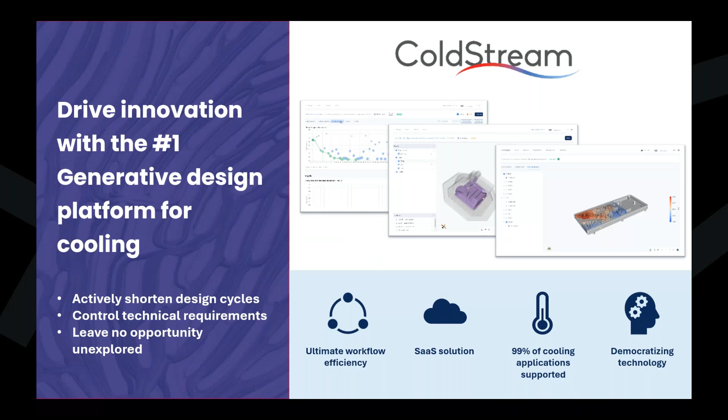Whether you have liquid cooling, air cooling, forced convection, natural convection, fans, pumps in your system, and so on, ColdStream supports the full system and can help you every step along the way to find the best possible cooling solution that fits your needs.

The reason why we can do that, or have that flexibility in physics and design processes, is by the way we constructed the platform in the backend. If you look at ColdStream from a high level, it's constructed as a combination of 5 different dimensions, 5 different building blocks.

I can imagine many of you are probably familiar with this simulation engine. In layman's terms, you give it a geometry, a product you have been working on, whether or not it already contains a heatsink, it doesn't really matter that much, but it can predict the resulting temperatures of your heat sources, your electronics, and so on, given certain environmental conditions.

It's basically a full three-dimensional CFD engine that can be used at high resolution, low resolution, and so on, and it predicts the performance of your product. Most of you probably use this on a daily basis to evaluate designs that you manually iterate over together with colleagues to see how to further improve it.

Now, what ColdStream actually enables is to couple the simulation engine with a shape generator. The shape generator can create, basically can modify your geometry, can control your geometry, and can create anything from pins and fin structures all the way to three-dimensional gyroids that are suitable for 3D printing, or complete freeform shapes. I will show you a few examples of that later on in this talk.

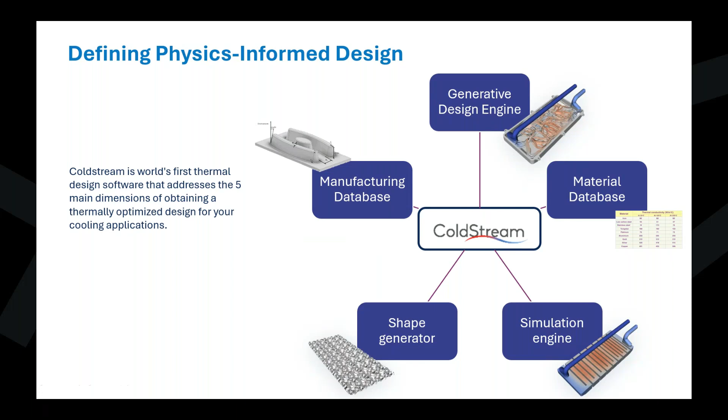And so you basically open up a new list of opportunities, and here on the screen you see a number of shapes, a number of examples that you can quite easily, with just a few simple clicks of the button, generate within ColdStream. To evaluate pins, fins, serpentine channels, the gyroids, and so on.

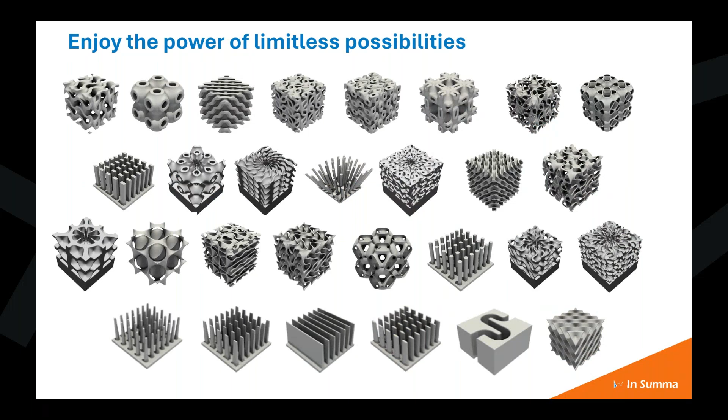And this is only the spectrum of the standard design, as we call it. So basically, a template basis starting from a predefined shape, searching for what's the best sizing of these components. And as you will see in a few slides, besides this list, you also have a whole series of options for full custom designing.

Now, workflow-wise, and this is a very advanced technology, and so we have been developing this for over 10 years. In the meantime, probably one of the most complex, most advanced design methodologies that you can find. But we don't expect, obviously, that our users of the platform are the same experts as we are, and so we try to make this as easy and simple as possible to use, and it basically comes down to a simple workflow that you're familiar with also from running any other CFD simulations or any other type of analysis.

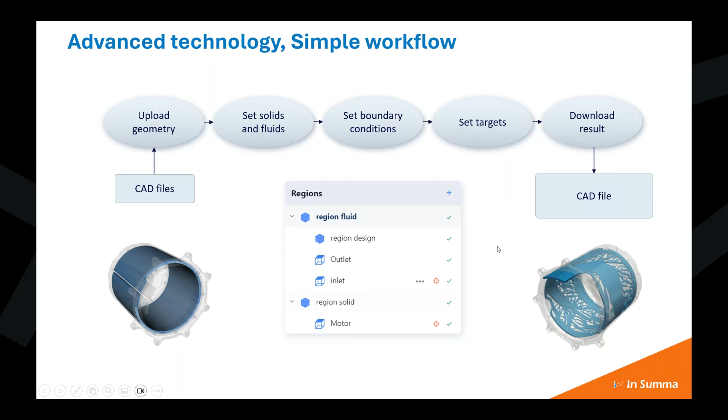So the real magic happens in these targets. There are more than 20 objectives and constraints available in ColdStream that you can use in a multi-objective, multi-constraint context, where you have full control over the different weights over the different targets. So there's absolutely no limit to what you can do to customize these inputs to exactly what you would like to achieve. So let's zoom in on a few of these steps.

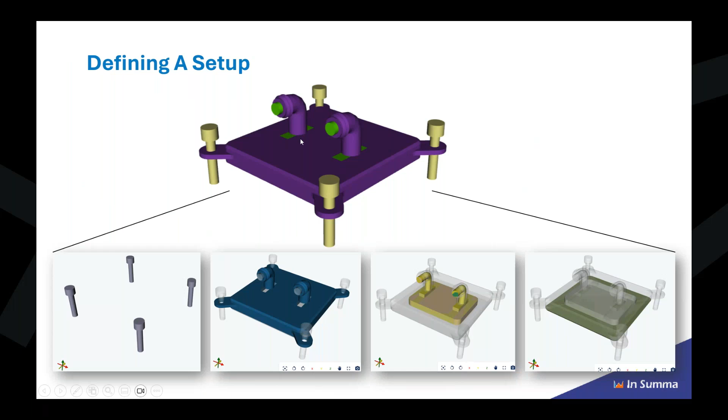Just imagine you're designing this kind of a chip cooler, like you see here on the screen. You have basically a few screws, a housing, and inside the housing you have space for a cooling channel. And then all the way on the right hand side, at the bottom, it's basically your heatsink. This can be a simple model for a GPU cooler or a CPU cooler, or a liquid cooled electronics module, and very similar also for power inverters.

So the first step of ColdStream, as mentioned, was importing the geometry, what you see here. Second step is specifying the materials, can be copper, aluminum, and so on, and then specifying the boundary conditions. You see here, total power imposed at the bottom side, 500 watts, split in 3 different regions. Again, full control over how to customize this. And the same with the design targets.

If you want to optimize this for a minimal temperature, simply define these 3 heat sources, the 200, 100, and 200 watts. Simply say, okay, minimize now the temperature on these heat sources with a pressure constraint on the inlet, because you don't want to end up with the pressure of several bars, especially not for this kind of a small component. Now, and then ColdStream can help you in many different ways.

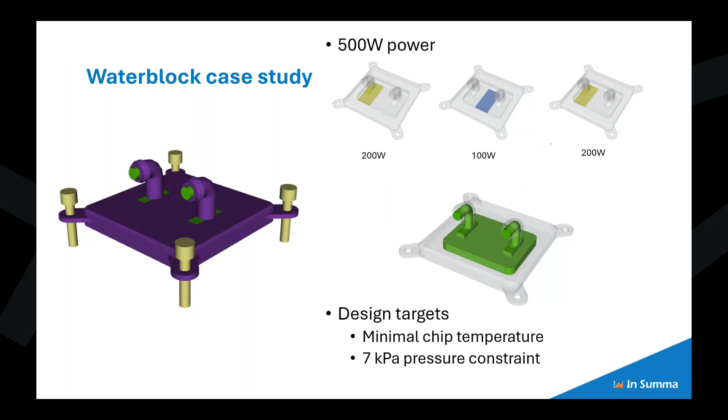So imagine that this is your starting point. If you look at a regular thermal design cycle, you have on the one hand typically a conceptual design phase, and then afterwards a detailed design phase. It's exactly that way of working that is also embedded in ColdStream.

So first step, defining the concept, means we indicate within the designs, within the model that we have built up, the space where we can make some modifications. And in this kind of example, a very classical question to ask is, okay, do I need, would a pin fin heatsink be best? Would a regular fin heatsink be best?

And obviously, that's where ColdStream can come in and be of big assistance to you. Because it's basically as simple as defining the setup once, selecting all the different variations you want to explore. And in this case, 3 different concepts. And pressing the start button, let ColdStream evaluate, for exactly the same input, for exactly the same targets, for exactly the same constraints, what's now the best shape.

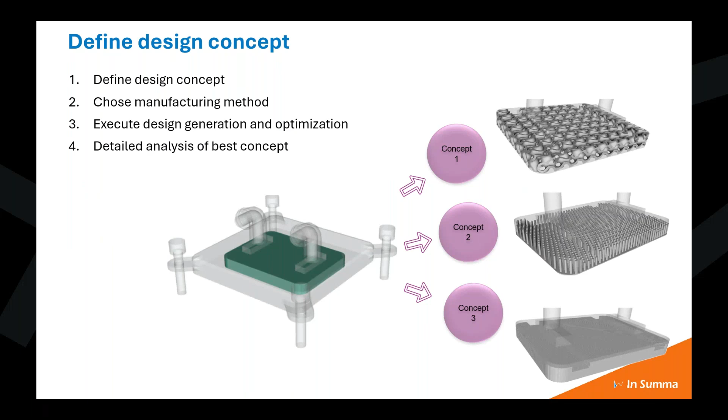And that makes comparison very easy, very straightforward, because each of these results, each of these designs of each of these concepts that you see, are evaluated with exactly the same models and against exactly the same constraints and targets. So all 3 designs, although they look very different from contact area, from fluid volume, and so on, they have an identical pressure drop, and they are bound by the same manufacturing methods.

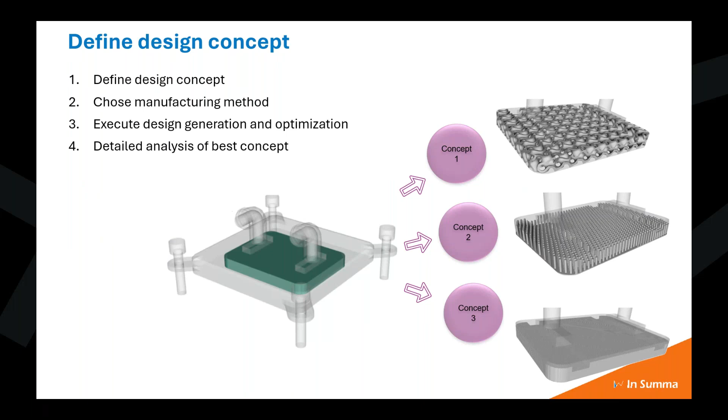So you have a very objective way to compare the three concepts, and you can easily push this to more than 20 concepts for a starting phase.

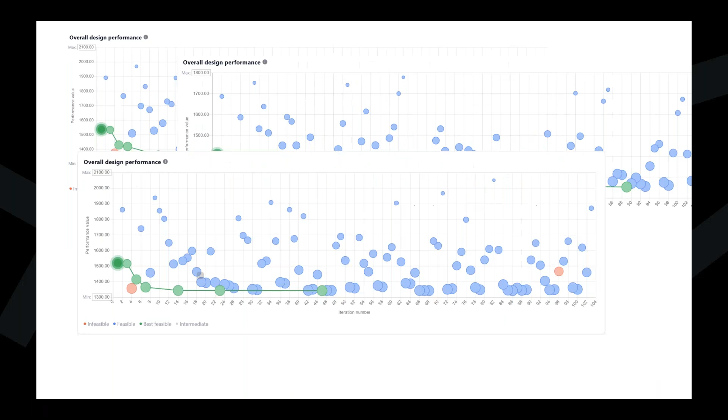And so what actually happens behind the scenes with this model is that for every concept that you evaluate, you actually run a full optimization. Again, it's all embedded. You get the output, you see what's happening, but you don't need to worry about the full setup of these things.

That's exactly the power of the generative design technology, because you end up with more than, in this particular example, more than 1,000 designs evaluated in less than 2 hours, for a setup time that probably is only 10 minutes.

So if you have to answer the question, okay, are pins the way to go, or fins the way to go, or anything else the way to go, after 2 hours of computing you will know the exact answer, and you will have left no opportunity untouched. This is obviously very powerful in a concept design, in an early stage of a design process. Very valuable to save time when you need it the most, because the last thing you want is to take a wrong choice here, go in the wrong direction, because that will be highly penalizing afterwards when you have to correct yourself for a choice you made all the way in the beginning of a design process.

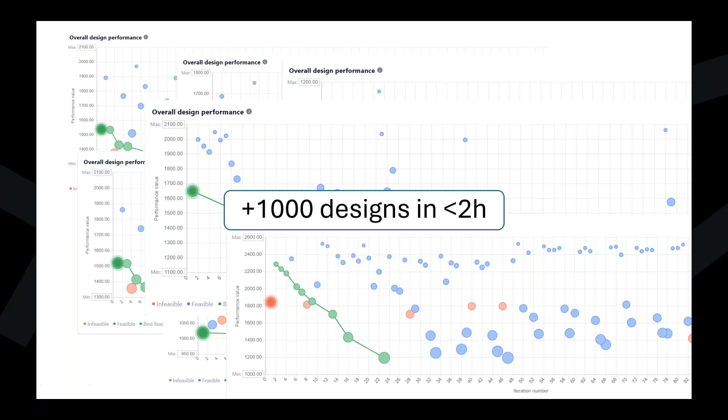So that's step 1. Now, with this first step also comes a whole bunch of additional insights that can help you understand what's the advantage of each of these designs that were created, where are the disadvantages, where are the cold spots, where are the hot spots, and so on. With the CFD engine embedded, the data is readily available - a few clicks of the button to visualize what's actually happening inside my component.

Now that's for the standard design process, or the concept design process. Imagine that after this concept design you say, okay, I have here pins and/or fin heatsink, and it's okay from performance, or it's not okay from performance yet - it would be best to squeeze out 10-15% lower thermal resistance.

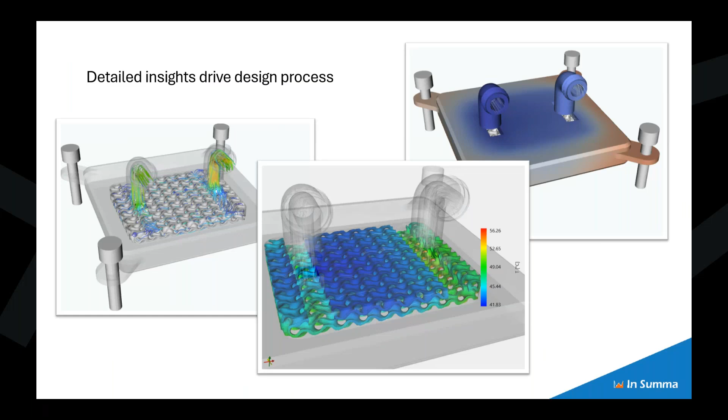Then we basically switch to the core of ColdStream, the most powerful functionality of ColdStream - that's the custom design functionality, the full generative design functionality, where instead of limiting ourselves to a certain template shape, you can actually give it the full freedom to design whatever you want to see.

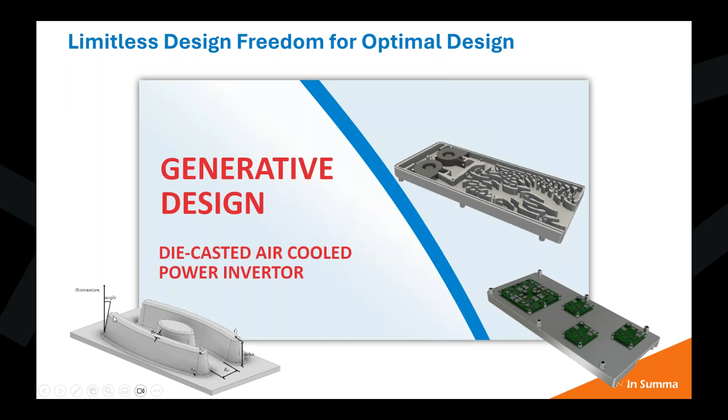A good example to illustrate is the following. Let me just zoom here to the initial starting point. So imagine that you're designing an air-cooled power inverter or air-cooled power electronics module.

You have a number of electronics mounted on the backside of this module - you see them here on the bottom right, and they generate heat and need to be cooled down. On the cooling side, you have two fans characterized by a fan curve, and an open space afterwards that you can use to create a shape.

The main boundary condition manufacturing-wise is it needs to be die castable, and this particular example was an automotive power inverter, so you need something that is mass manufacturable afterwards. You see in the picture at the bottom left that the full die casting process is characterized by a number of parameters. By specifying these parameters and the bounds to these parameters, like minimal channel width, maximal channel width, draft angle, and so on, you are in full control over what is manufacturable and what is not within ColdStream.

So step one, importing the geometry. Step two, specifying the boundary conditions and the materials. Then the last step, specifying the targets, and that's minimizing the temperatures while respecting the fan curves. And then the last thing to do is press the start button.

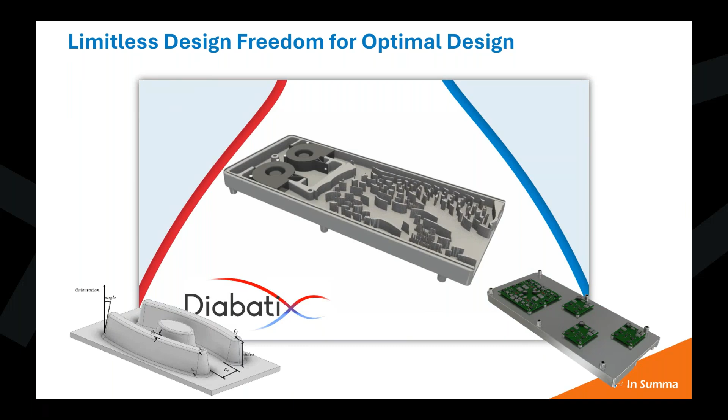So what you actually now see on the screen is a visualization of the design process that is ongoing in the backend. Every frame of this video is one iteration done by ColdStream, and gradually you see it evolving into a structure.

Gradually you see it evolving into a structure that is highly organic, but still perfectly meets the manufacturing constraints of your die casting process, so that you can benefit from the flexibility your manufacturing process actually offers, instead of putting just regular straight fins in here - but still making sure that it doesn't come at an added cost when you put this in production.

Now, a few things you can notice when you look at the design: it looks highly organic, maybe almost random, but the full process is driven by the physics that are actually ongoing in this product.

If we look at this heat source underneath my mouse pointer, this is actually the electronics module. It's cooled by these pin structures you see here in the top middle of this part. These pin structures are characterized by a high heat transfer coefficient, and the boundary layer is continuously broken up - high heat transfer coefficient, but it comes at the cost of a higher pressure drop.

Now that higher pressure drop, if you did not take that into account, would penalize the operating point of the fan. So what actually happens is that ColdStream will add this wide open channel afterwards to make sure that the overall pressure that the fan sees is limited, so that the flow rate is still sufficiently high to provide sufficient cooling capacity to these cooling structures.

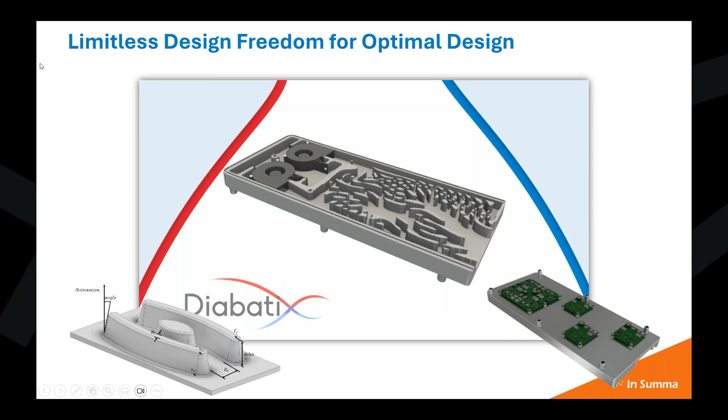I hope I managed to convey the message that the real power used to get these additional performance gains is fully based on the physics that are ongoing and controlling those physics. That translates directly to the gigabytes of simulation data used internally to train a model that understands what physics are ongoing and how they can be controlled for better use.

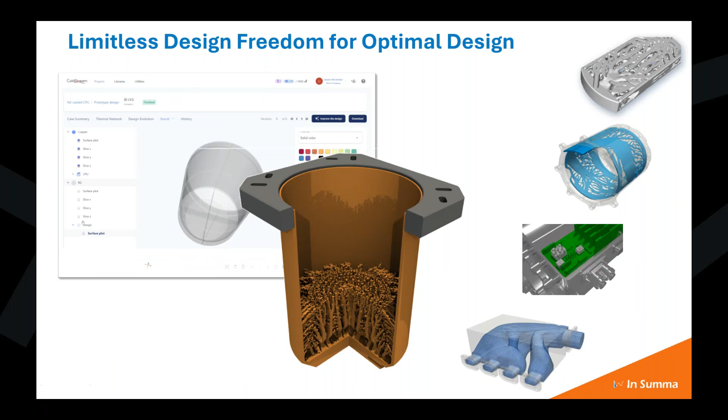So that was for 3D printing. If we switch to a different manufacturing technique, we keep all the models the same. The optimization engine, or generative design engine, remains the same. The only thing we switch is from 3D printing or die casting to sheet metal forming, and again we open up a completely new line of products that you can start optimizing.

In this case, for sheet metal forming, you can quite easily design battery cold plates used to cool batteries in EVs or hybrid cars. So just a few clicks of the button and your power inverter design tool has switched to a battery cold plate design tool with exactly the same workflows and so on.

The only thing that changes is the specification of your manufacturing constraints, and that's basically it. You see here variations from regular dimple structures to highly organic, highly complex structures that fit perfectly within the scope of your often very complex manufacturing constraints.

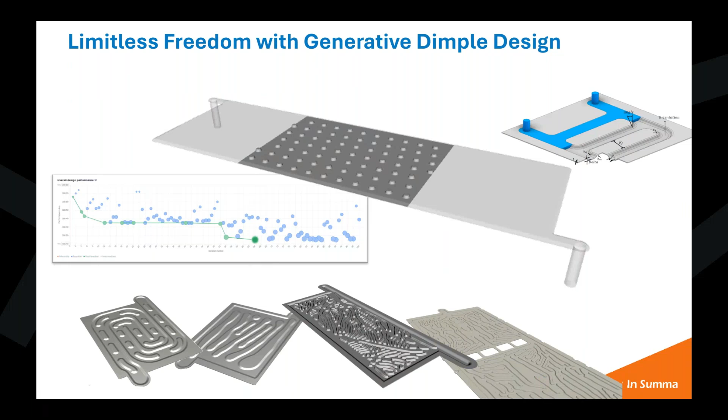So liquid-cooled electronics, it's just a very simple comparison, and the story is always the same. You set the boundary conditions, set the materials, specify what target you want to achieve, and then let the computer do the heavy lifting for you. You see that the simple serpentine channel can basically be replaced by an organic structure like you see here at the top, where you can gain easily 20% of performance and 60% in pressure drop, with uniformity that also goes up by more than 15%.

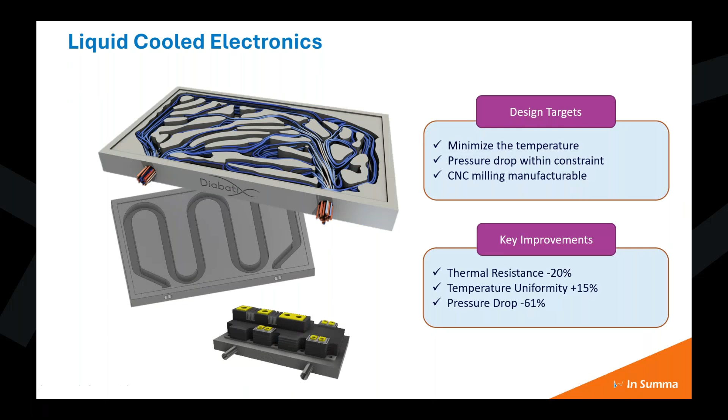Same story here for an inverter cooling.

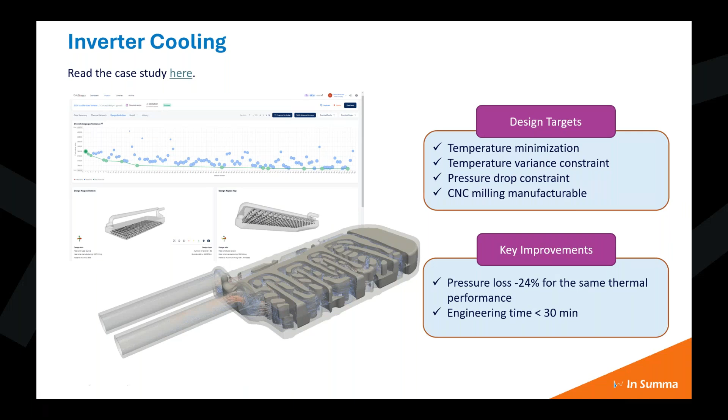For the same thermal performance, saving 25% or 24% in pressure loss, while keeping your engineering time, your human time, in less than 30 minutes, perfectly within the scope of what the technology can offer to you.

The message I wanted to pass was, it's one platform, but the possibilities are basically endless for what you can do in the field of thermal management. I gave a few examples on air cooling and liquid cooling, on regular, let's say flat geometries, but also e-motor cooling on curved geometries. All of that is perfectly possible.

Topics we didn't touch in this webinar, but please reach out if they would be of interest: our heat exchangers, manifold designs, or very in-depth CPU and GPU coolings. Feel free to reach out on those topics as well.

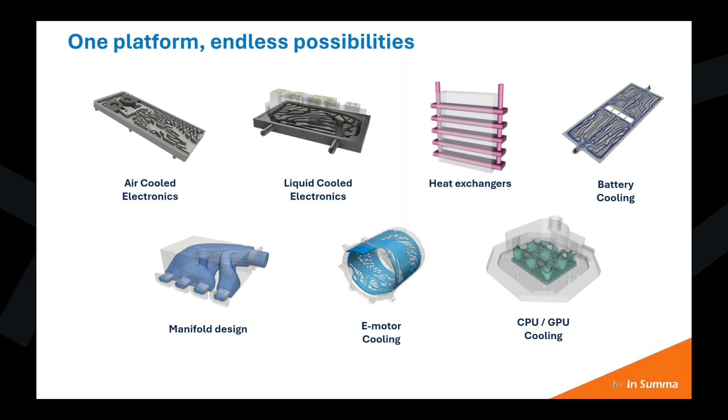Yes, thank you very much, Lieven, for the comprehensive presentation. I think this also showcased the possibilities with respect to ColdStream, and the many different areas it can be applied to.

We do have some questions for you. One of them is with respect to targets: can you set multiple, concurrent targets for mass, pressure drop, and temperature performance?

Excellent question, and I find it excellent because the answer is yes. We have more than 20 objectives and constraints available within ColdStream, and they can be combined however the user sees fit. Obviously, the more constraints or targets you add, the more complex the design process becomes, so it might take a little longer to evaluate. But it's perfectly possible to combine a temperature minimization with a pressure minimization and a mass minimization to find a proper working point that suits all three objectives. Obviously, to make that choice on what is best and most suitable, that's where the engineer comes in again with their expertise.